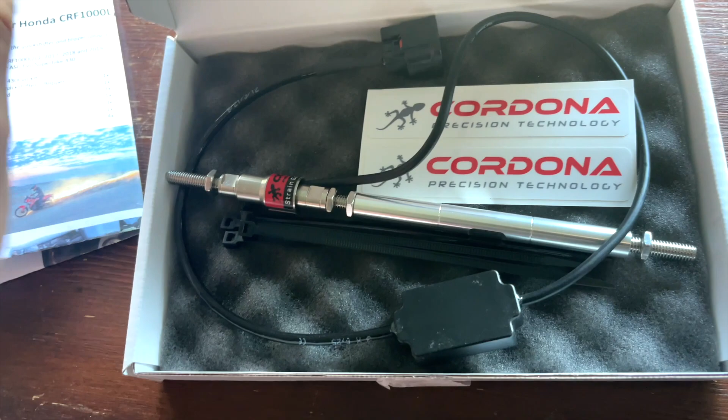Okay, this is the box, let's open it. So we got a little manual, the quick shifter, and some stickers. Nice. I'm gonna do this step by step to make it a little easier.

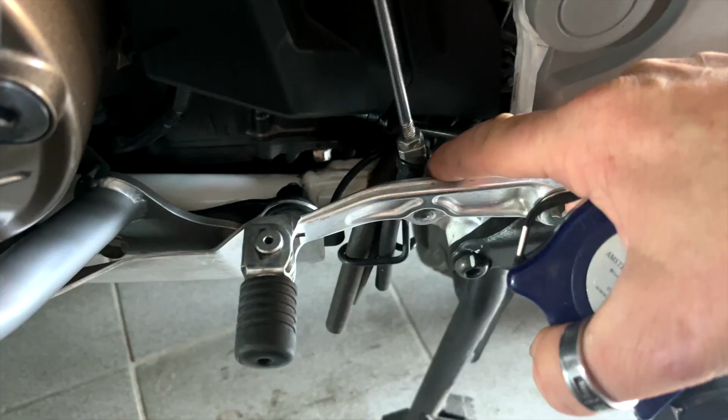So let me measure that one and write it down. It will connect to this point. I'm gonna measure it from this point to that point there, which you can't see. Alright, wrote it down, that's 8.7 centimeters. This one needs to be the same.

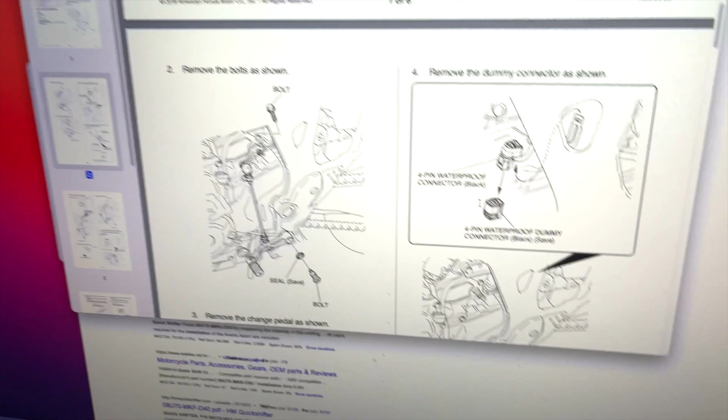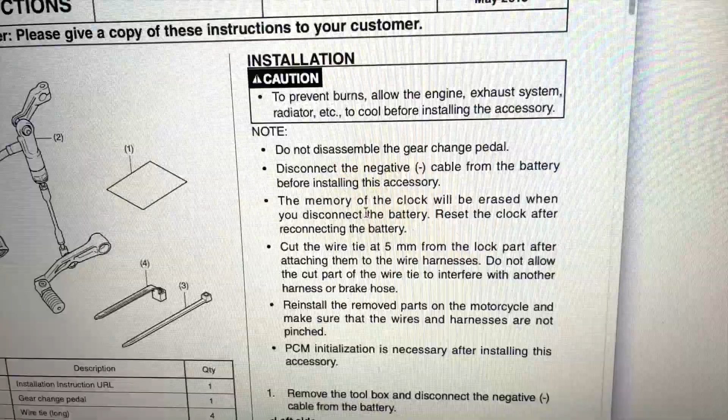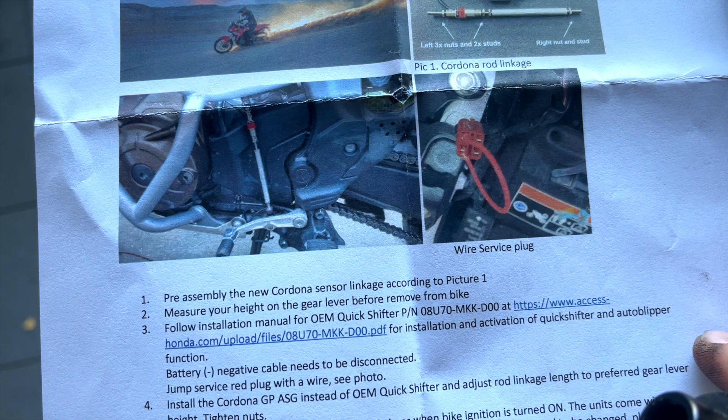Well, this is the manual. I need to remove the upper and lower parts. There's a plug in the back, but there's also my Heed crash bar system, so it's gonna be tight. I need to disconnect the negative cable from the battery before installing. Here they say find the service plug and wire it so there's a loop. Honda also mentions it, but they come with a special plug, which of course I don't have.

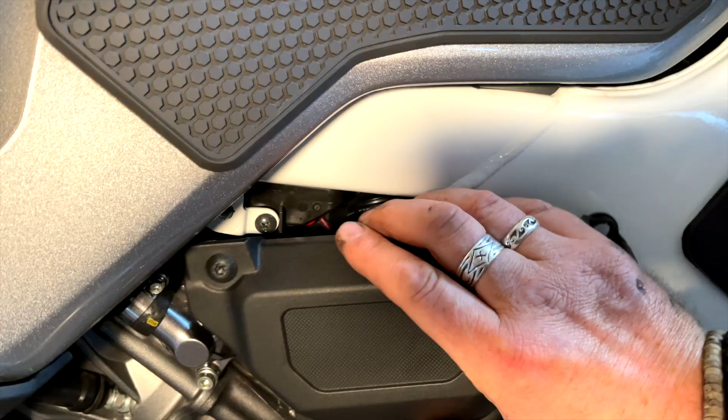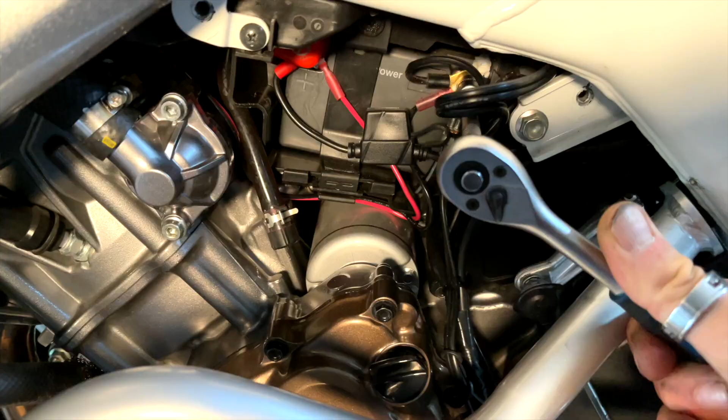Alright, let's first take off the battery cover, which is a crime on the Africa Twin. This is the battery cover, and under here is the battery. Let me remove this one. Alright, and here you see the negative terminal. There's a lot of things on it, and that's basically a crime to access, but yeah, there we go, disconnect.

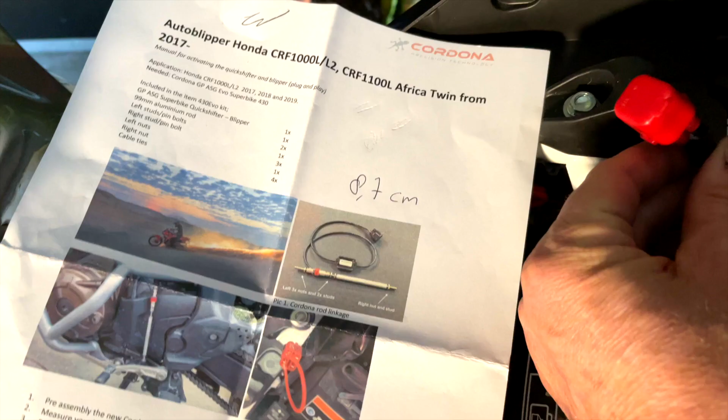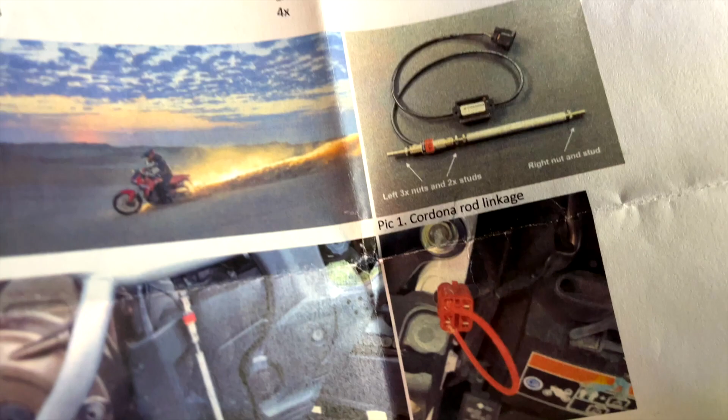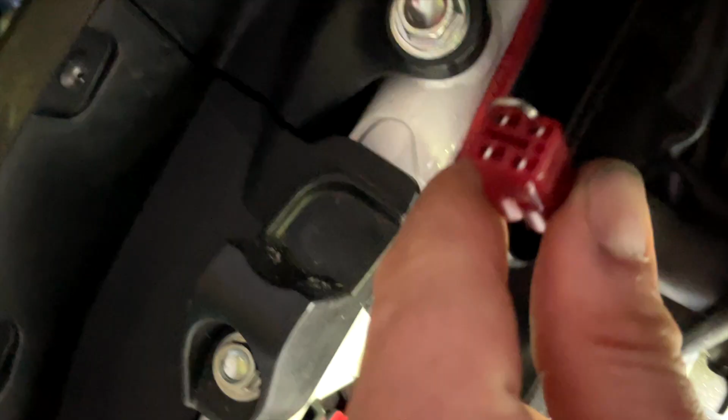Okay, after some searching, this is the DLC connector, and I need to short it with a wire or a paper clip. I'm gonna try it with a paper clip. According to the picture, you see this little thing here, which I see here, so I have this little piece of metal from the paper clip. I'm gonna stick it in those two holes. Let me do this. Voila, nice.

I don't know if you guys can see it, but this thing here is finally loose, so this needs to be taken off. But we're like 30 minutes later. My God, I'm exhausted.

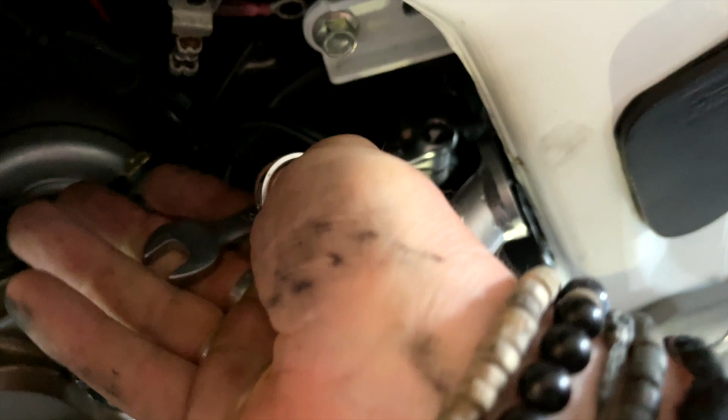This one, if you can see it, probably not, but there's a hole in that screw pointing to the space. First one. Oh yes, right. Oh, that was very easy.

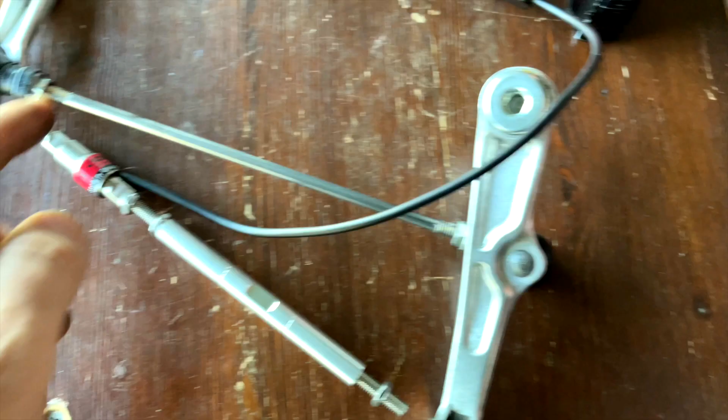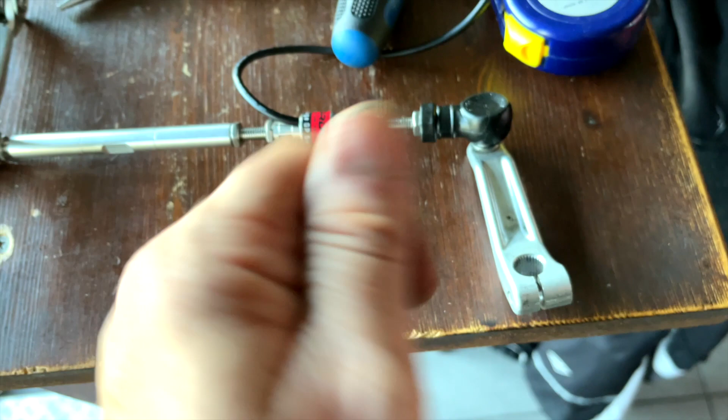I just unscrew this one and this one, put in a new one. That's all. After some adjusting, it's now the same length. The screws are still loose, so I'm gonna tighten them, which is very confusing because all the screws go the opposite direction. I'm gonna put it back on the bike and tighten it.

It's connected, but I don't know, it's not very tight, and I can still easily turn it with my hand, even though all the screws are tightened.

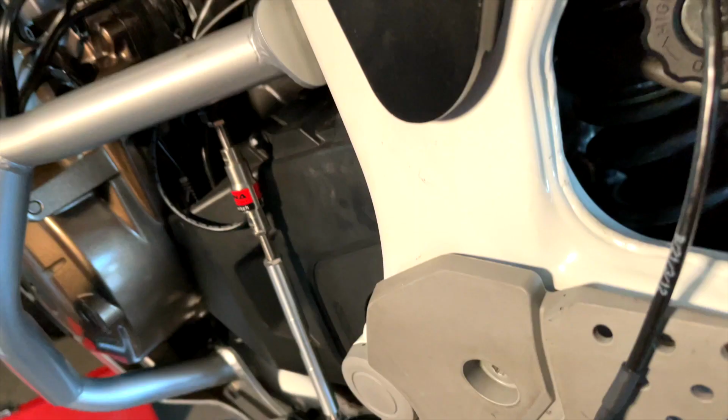The next step is to connect this connector to the horrible thing there. As you might understand, I cannot film it and do it at the same time. Then I'll do a little cable management, and then I should program the Africa Twin, and then it should all work. Still having doubts about this connection, but anyway.

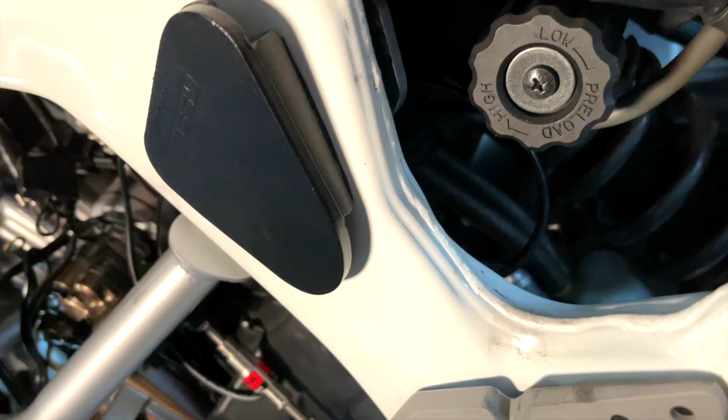Alright, let's see if I can connect it. Well, you cannot see it, but it's back in place. Jesus Christ, what a job.

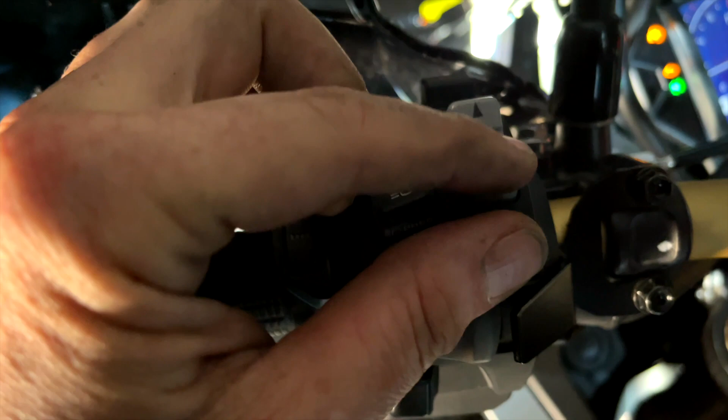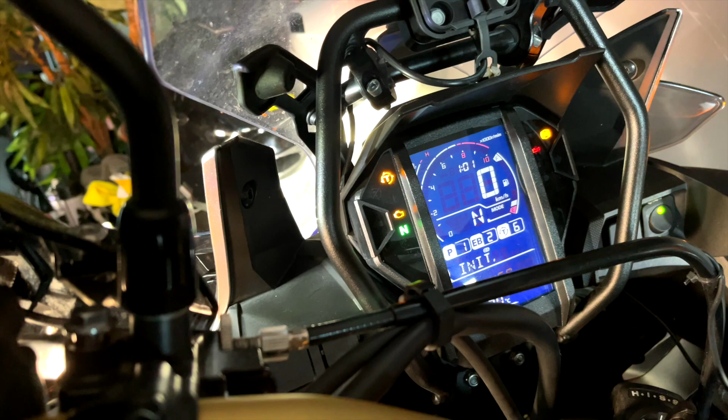Honda says you have to press select a mode for a few seconds. Now it says quick shifter off. And now I say on. Initialize, that's good, I say yeah. And then it says start engine. Okay.

I can also select the quick shifter mode. Let me check, hold on, let me click a few times. There you see, up 2. And 2 is, you can choose from 1 to 3. 3 is you have to press harder, and 1 is you have to press lighter, and 2 is in the middle. And then you get up and down.

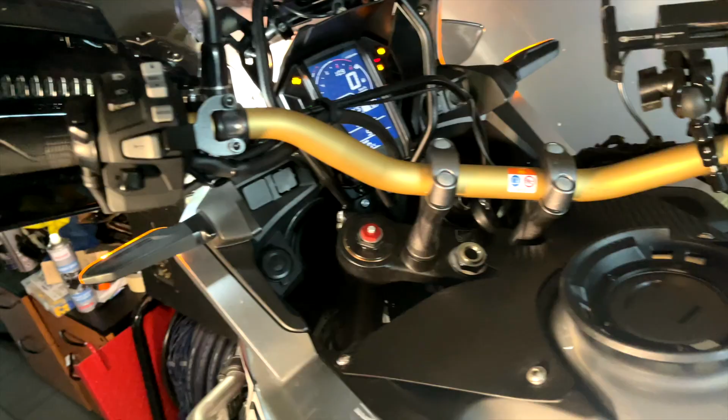I'm gonna put everything back in order and do the cable management, etc. And then I'm gonna do a test ride.

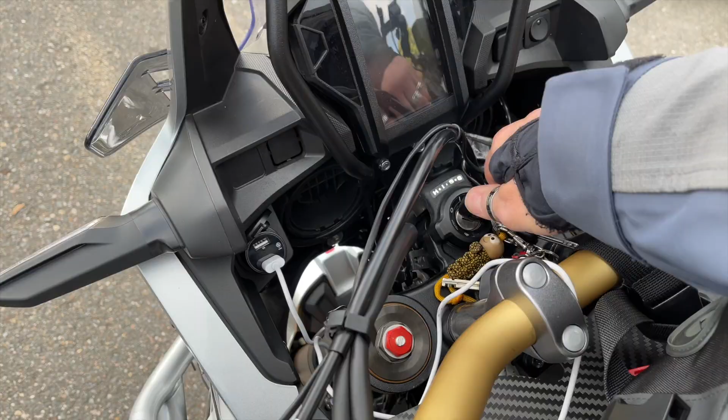Alright, let's take it for a test ride. Let's test it out. So that was with the clutch, and now I'm gonna do without the clutch. Just hold the gas. Yes. Very good. And the downshift with no clutch.

You do this for the noise. Yeah, works perfectly. You got the Africa Twin settings from 1 to 3. 1 is the lightest, 3 is the hardest. I took number 2, the average, and it seems to do fine. So I can upshift easily, also in low revs like here.

And now I want to see if I can use this from 1 to 2, because most gear shifters I tried work fine after the second gear, but not so good in the first gear. So let me see, from first to 2. Yeah, worked. Yeah, it worked fine. No problem whatsoever, I can downshift easy. Cool.